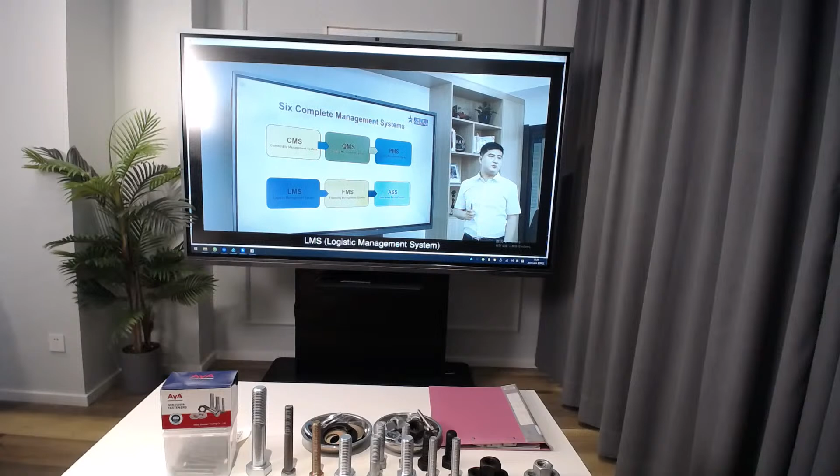All our employees devote enormous time and energy to meet the need of the market, steadily boosting corporate sales. We are committed to providing one-stop building materials sourcing solutions for overseas buyers. We mainly deal in roofing sheets, metal pipes, fittings and valves, wire and mesh, metal fence, iron art, fastener and screw, home DIY decoration, and other steel products. We now work with more than 500 selected and inspected mills of A level to provide our customers with low-cost guarantee. We also maintain long-term cooperation with world-famous contractors, wholesalers, and home centers. Sinostar has 6 complete management systems: CMS, the Commodity Management System, QMS, the Quality Management System, PMS, the Pricing Management System, LMS, the Logistic Management System, FMS, the Financing Management System, and ASS, the After Sales Service System. We inspect and supervise the whole process of production, from mill sourcing, order placing, raw materials, manufacturing, packaging, and warehousing till container loading, so as to continuously provide our customers with products and services of high quality. We have our own logistics department and freight forwarder that are responsible for the last mile logistics, providing DDP destination customs clearance and third-party logistics services for overseas buyers. Sinostar is proud of its young, professional, and well-trained team with great passion and creativity, together with the efforts of all members of the group. We believe that Sinostar will soon become a flagship of the foreign trade industry.

Okay, now let's get back to our live streaming. Tassie, it's a very nice video. Pretty good, we got to know a lot about Sinostar from this video. Now let's talk more. What's the advantage of Sinostar?

We provide one-stop building material sourcing solutions, and our main products include roofing sheets, metal pipes, wire mesh, pins and gauge, fittings and valves, fastener and screw, iron art, scaffolding, stainless steel, aluminum and other steel products. You can easily buy whatever you need here to save time, and that's why many big importers and home centers have had long-time cooperation with us for over 10 years.

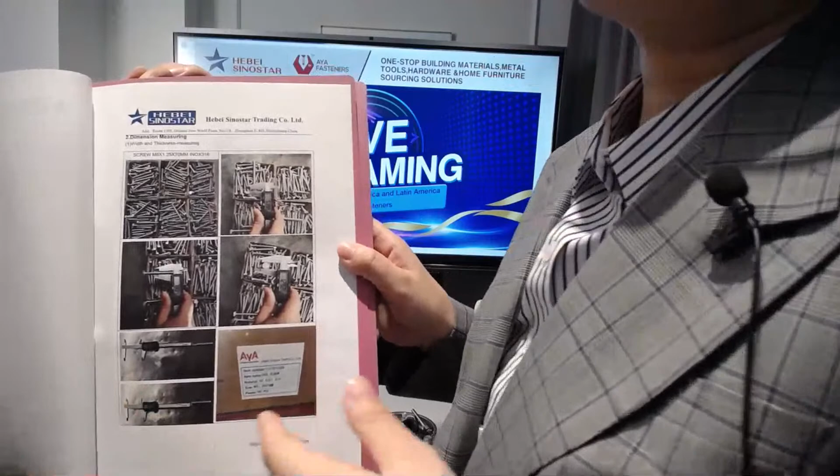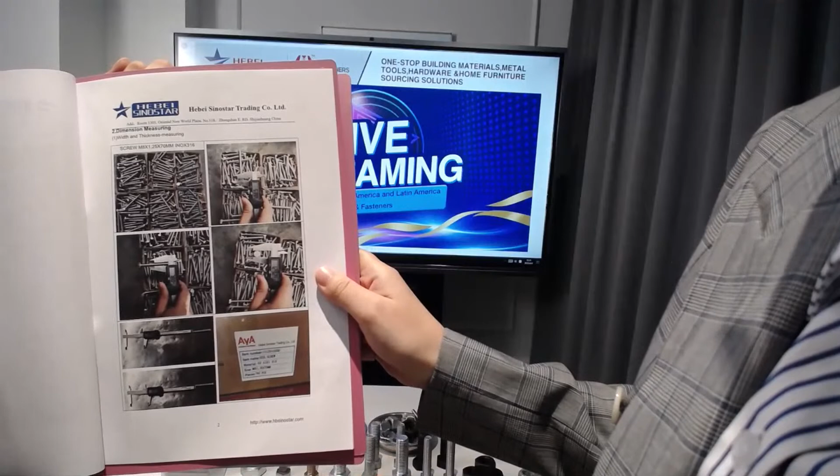Now let's introduce the second part, which is our dimension measure pictures. On this part, our QC will put the total inspection pictures on every size. For example, this page is our size screw of M8 by 1.25 by length is 70 millimeters, and the material is stainless 316.

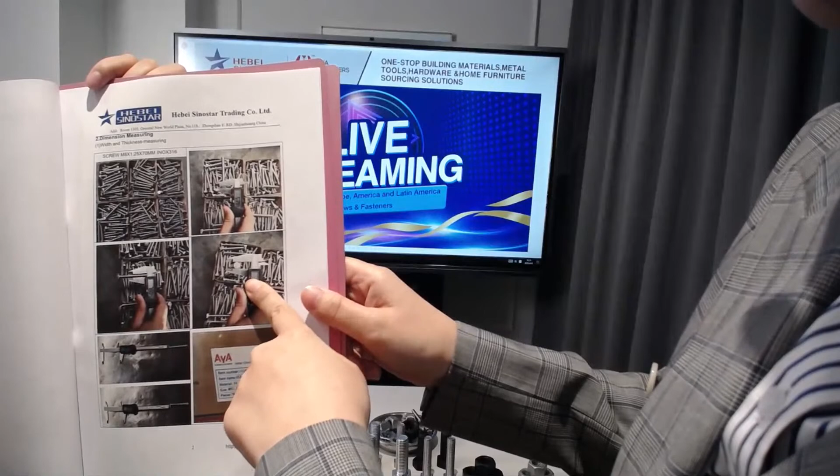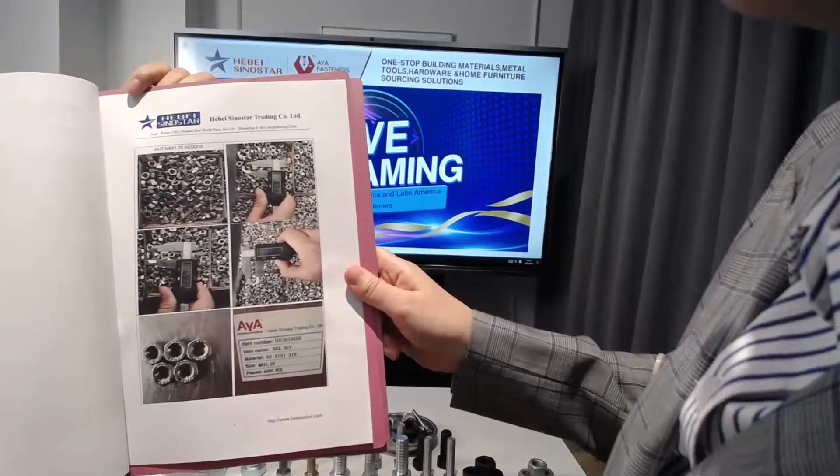We can see this is the surface inner box surface pictures, and this is the head thickness test picture, and the body diameter, and this is the width to width hex, and also the body length, and this picture is a label carton label pictures. Okay, another page, this is another size for the nuts, and the nuts is M8, and the thread pitch is

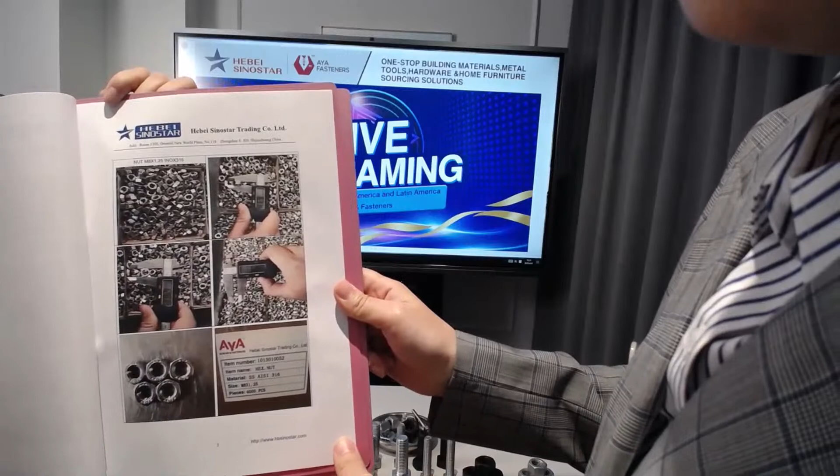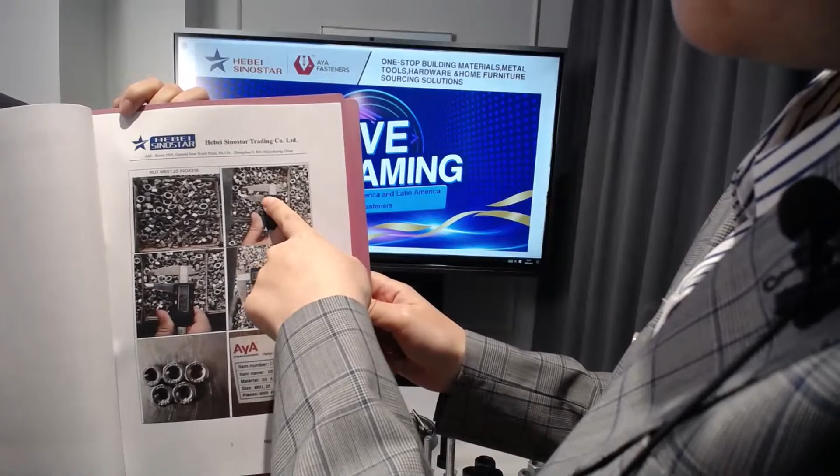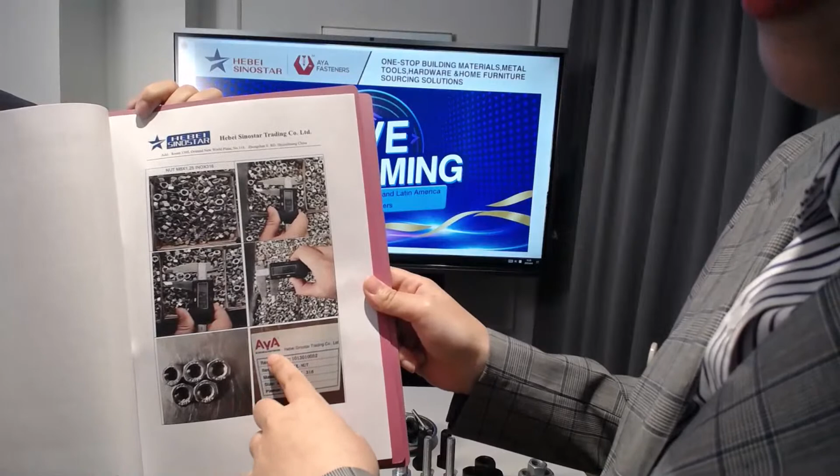1.25, and also the material is stainless 316. You can see this is a nice inner packing and inner surface picture, and this is nut thickness and the width to width test, and this is the inner diameter, and also it's very clear for the AYA label, and also this grade label is A4-70, which means our material is 316 stainless, and also this is the carton labels.

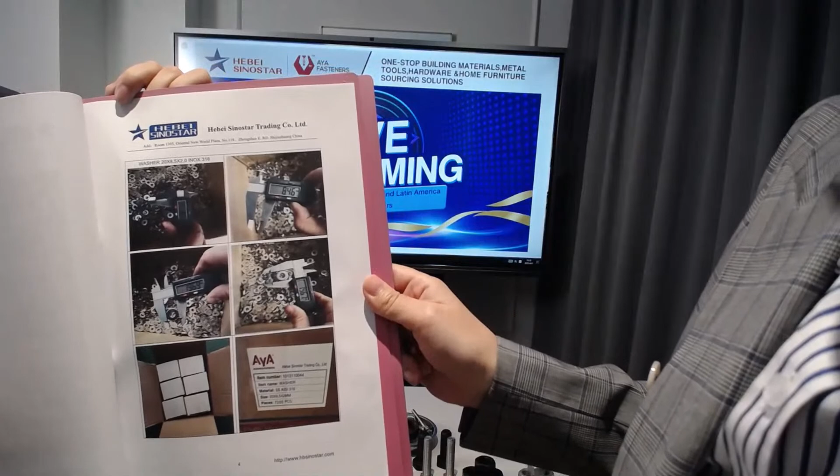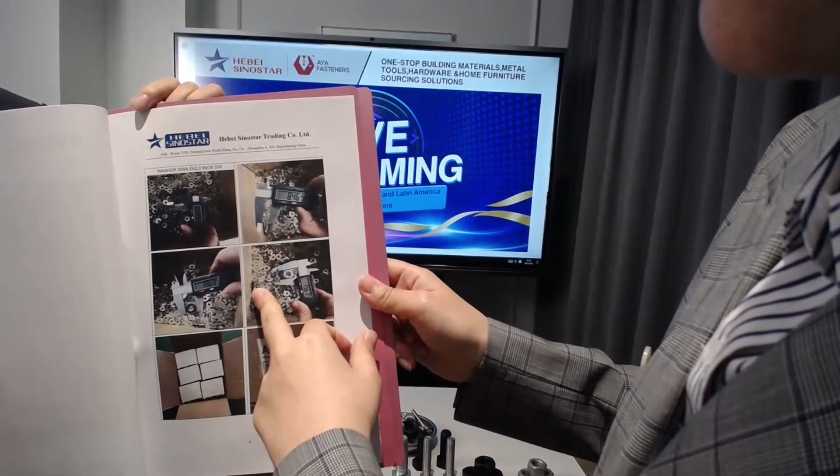And the other side for this inspection report is our washers, and the washer size is 20, and the thickness is 8.5 millimeter, and also the material is 316. You can see the different testing pictures for the outside diameter, and this is the inner diameter for the bore. Also have the thickness, and this is the inner packing box and also the labels.

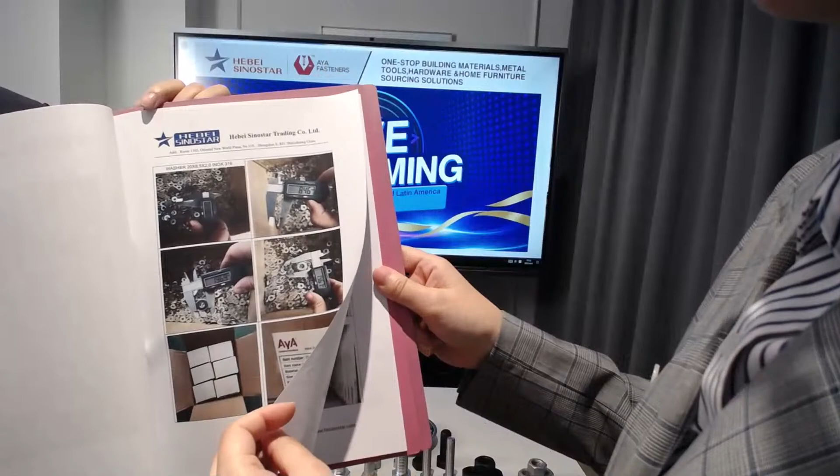This is our total test for this other side, and we will put all the pictures on the inspection report for our customer to check. And now let's introduce the third part.

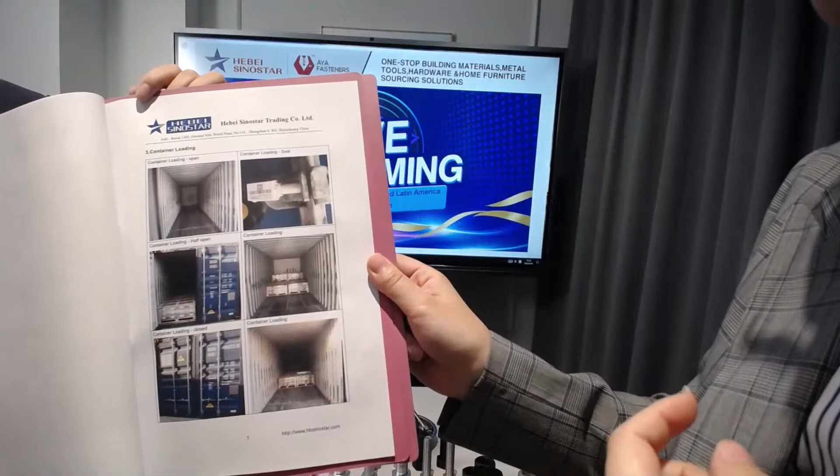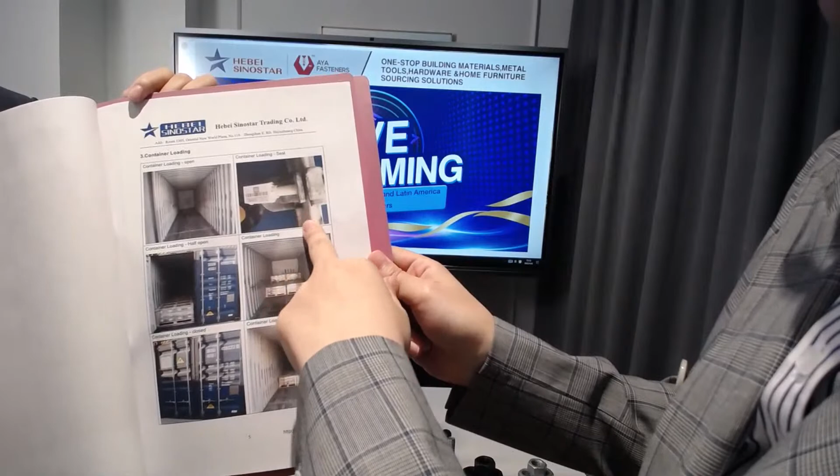The third part is our container loading pictures, and on this part, our QC will put the loading container pictures to show our customer. Like this one is totally open, and half open, and also the closed with seal picture, and this is in the middle loading pictures.

And this surveyor and reviewer, and this date is our inspection gauge date. And also maybe our loading container dates is from different loading dates. Yeah, this is totally the inspection report.

Okay Rita, I think from our introduction, our customer will know about our inspection report. Okay, I think my customers will like this inspection report. It's very helpful. Yeah, I think so. Okay, and then let's move to the next part.

Today's live streaming focus is on the Europe, Latin America, and North American market. Our main products are bolts, nuts and washers.

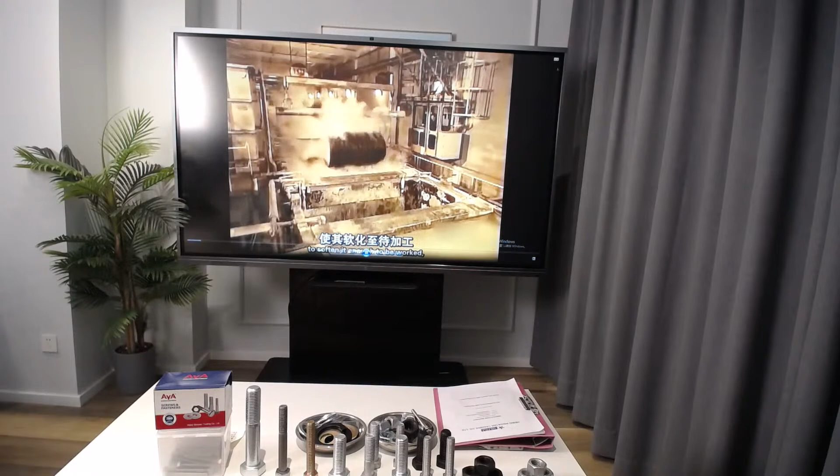To soften it enough to be worked, the wire rod goes through a process to remove any rust particles. It's rinsed in water, then coated with phosphate, a chemical compound. This prevents the steel from rusting before the bolt forming begins, and lubricates the steel to make forming easier.

They form the bolts by cold forging, shaping the steel at room temperature by placing it through various dies at high pressures. The forming machine first straightens the wire rod, then cuts it into pieces slightly longer than the bolt length. The extra will become the bolt head.

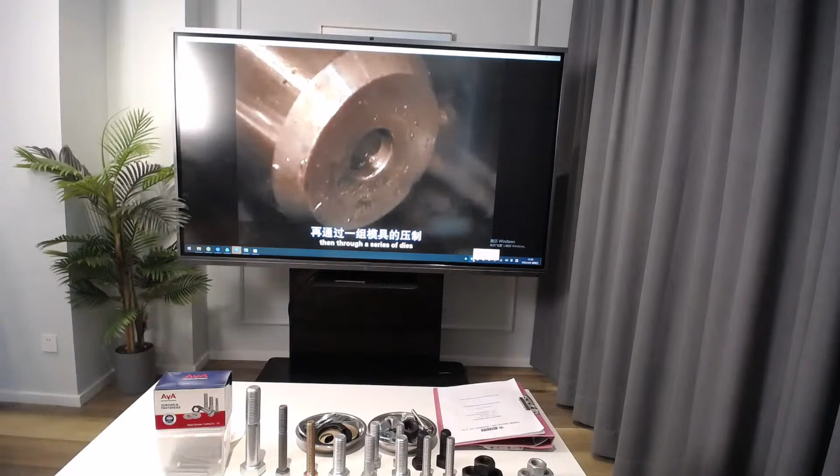Each piece goes to a die that makes it perfectly round, then through a series of dies that progressively shape the head of the bolt on one end. The machine heads up to 300 bolts per minute. Here's what the heading stages look like in slow motion.

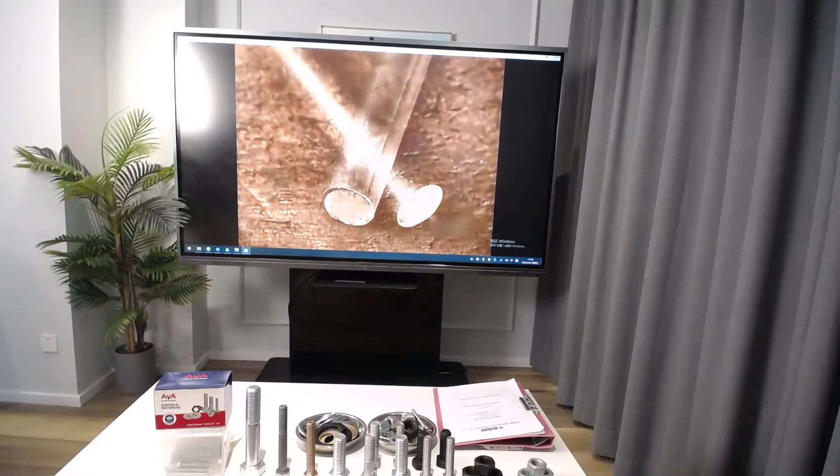This die creates a slight collar. The next one turns it into a round head.

Then the last die transforms that into a hexagonal head, the most common shape.

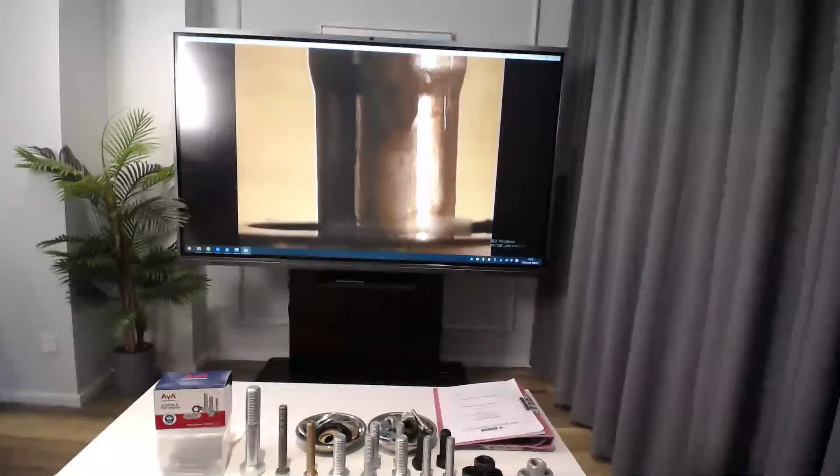A machine forms the opposite end of the bolt. A tool called the pointer shapes the bottom of each bolt, creating what's called the chamfer, the part the nut catches onto. Here's the bolt before and after the chamfer.

The bolt needs threads to enable the nut to screw onto it. Once again, they use the cold forging method. High-pressure rollers press in the thread pattern, as we see here in slow motion. This is the actual speed, up to 300 bolts per minute.

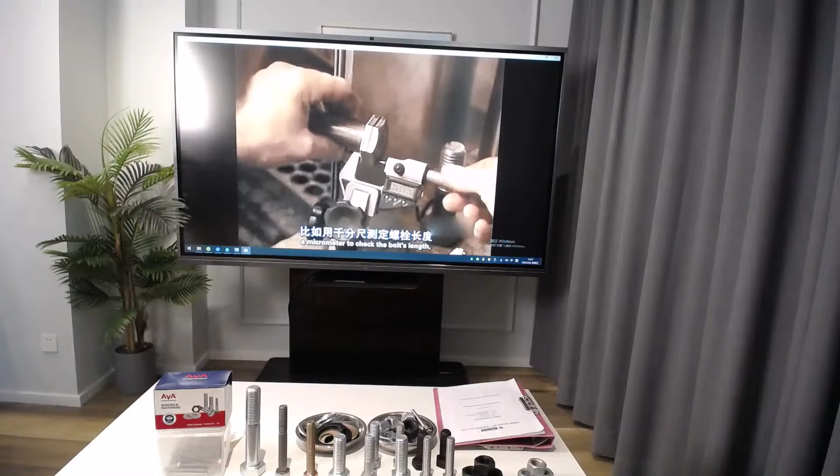During each production run, they take several samples to verify dimensions. They use various measuring devices: a micrometer to check the bolt's length, calipers to measure the width of the head, and a ring gauge to check the threads.

To make the nuts, they use a process called hot forging. They cut steel bars into small pieces known as slugs, then heat them to 1200 degrees Celsius to make them malleable. As we see here in slow motion, hydraulic hammers punch the slugs into hexagons, while a die pierces the hole.

Then a tool called a tapper drives into the hole to cut the threads. That black liquid is a lubricant oil to minimize the wear and tear on the tappers.

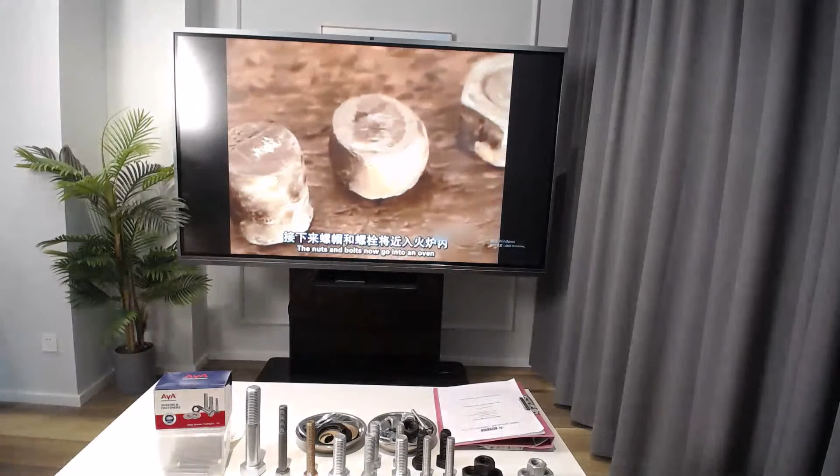The nuts and bolts now go into an oven at 870 degrees Celsius for about an hour. This gives them the required strength. Then a rapid cooling oil for 5 minutes solidifies the steel's internal structure. By now, the steel is hard but brittle, so they keep the nuts and bolts for another hour. This removes their brittleness, yet maintains their strength.

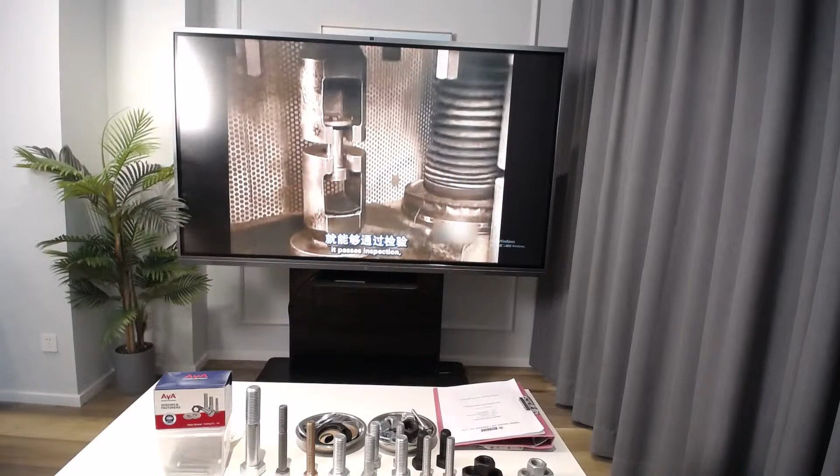The quality control team takes samples off the line, measuring how much force it takes to break them. If a bolt meets its minimum strength requirement, it passes inspection, provided the break occurred in the threading, the weakest part. Finally, packaging, labeled among other things by size and grade.